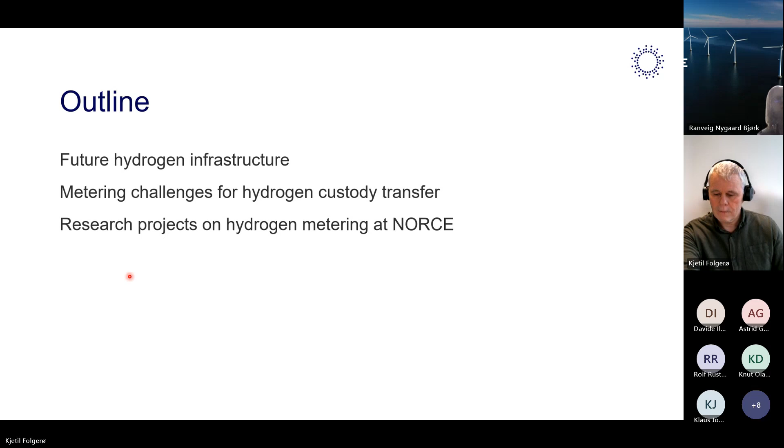Page down is not working.

Here we are. Okay, if we look at what the European Union and the International Energy Agency think about hydrogen, they say that it will be an important part of the green shift. In the EU, they plan for an import of 10 million tons already by 2030, and in addition to produce another 10 million tons themselves within the EU.

As you can see in the figure to the right here, which is a global forecast by Det Norske Veritas or DNV, today we are not producing much, but that will increase steadily and very fast from 2030 approximately. What we also can see is that a large part of this increase will be industrial usage of energy and also transport, long distance transport first of all.

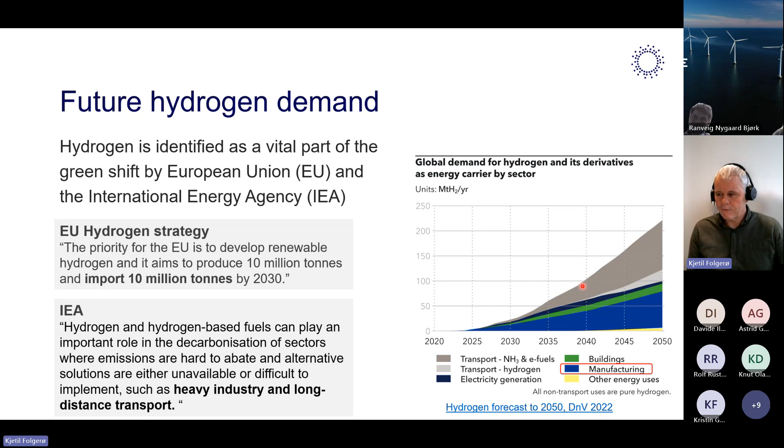So if that's gonna happen, that means that we need to build a new value chain here. We need new production facilities, new storage and distribution facilities, and also new applications coming in. And all this has to happen at the same time. Different people have looked into this to see how the transportation can be made most cost efficient. And it seems for Europe at least, that pipeline transportation will be the main distribution method.

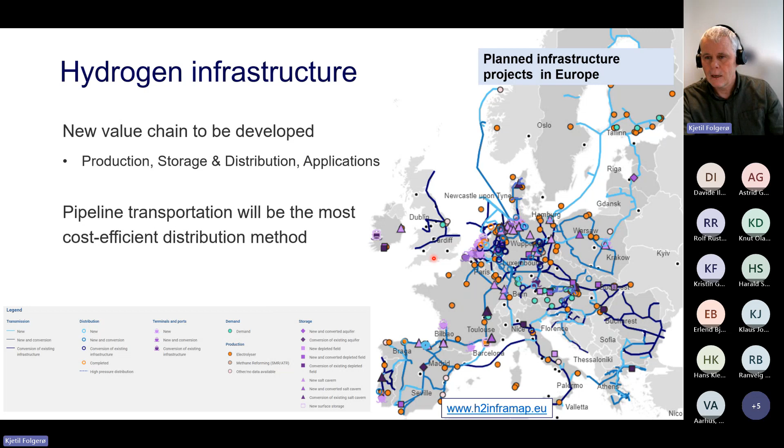Here are some planned infrastructure projects, and you can see some of the pipelines that are planned today. One of the initiatives is the European Hydrogen Backbone, where European energy infrastructure operators, 33 of them, come together, covering 28 countries in Europe. And they are at the moment planning for this kind of structure in 2030. For instance, they are planning for 5 different import corridors, one from Norway/UK, further from the Baltics, and also from the south from Africa, and other places as well.

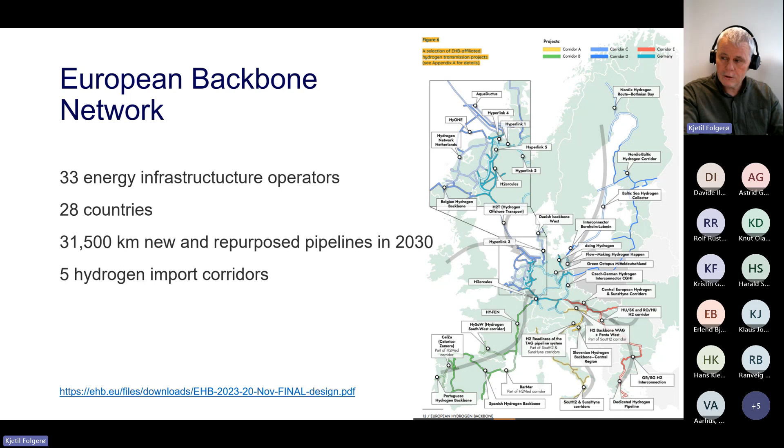And one of these corridors will maybe include the Norwegian pipeline that has been studied from Norway to Germany, where a feasibility study was carried out by Gassco and DENA, where they plan to produce blue hydrogen or low carbon hydrogen in Norway, in Nyhamna on the west coast of Norway, and transport that to Germany. In addition, we might add some locally produced offshore hydrogen coming from wind parks on the way.

So what we see is that at the moment, most of the hydrogen is produced locally and applied locally. So most of the pipelines that exist today come from a local producer to a single industrial user. That means it's quite easy to know who will get paid how much. In the future, the hydrogen pipelines will be integrated in a much more complex energy grid. We try to illustrate that in the figure to the right here.

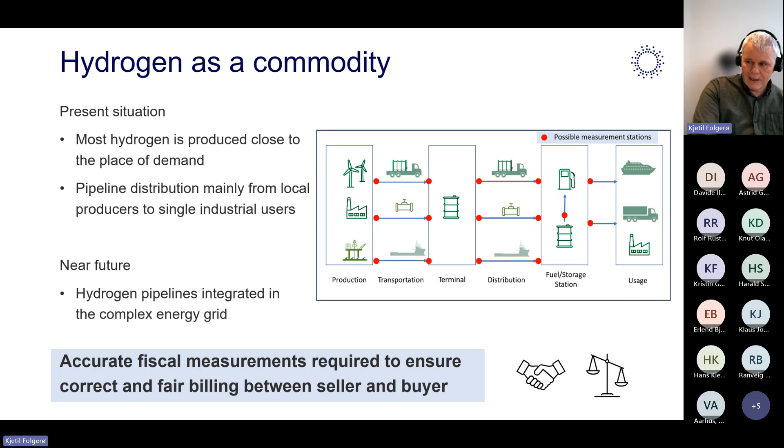It would be a mix of different transportation means, where pipelines will be the main thing for long distance transportation or medium distance distribution. Anyway, to make hydrogen a commodity, as the EU is planning for, there is a need for accurate fiscal measurement so that the seller and the buyer get the correct and fair billing. That's the thing about custody transfer. We need to know that everybody is happy. So we need to measure accurately.

Okay, when it comes to hydrogen metering, we want to adapt measurement technology from the oil and gas industry. There's a long history of how we can measure natural gas with low uncertainty and high reliability. The challenge with hydrogen is that the properties are a bit different from natural gas. The meters will respond differently, so they may be tuned or adapted for hydrogen. Further on, there is a lack of industrial experience in the metering issues here, and when it comes to calibration and test facilities.

Further on, also due to this, there's a lack of knowledge of the actual uncertainties and the technological risk regarding the different meters that will or may be applied. And lastly, the regulations are not in place, and the standards that the meters need to follow are not quite yet there. So the research question here is that, knowing that you need to build this, how can we do it? How can robust and cost-efficient measurements of hydrogen along the supply chain be ensured?

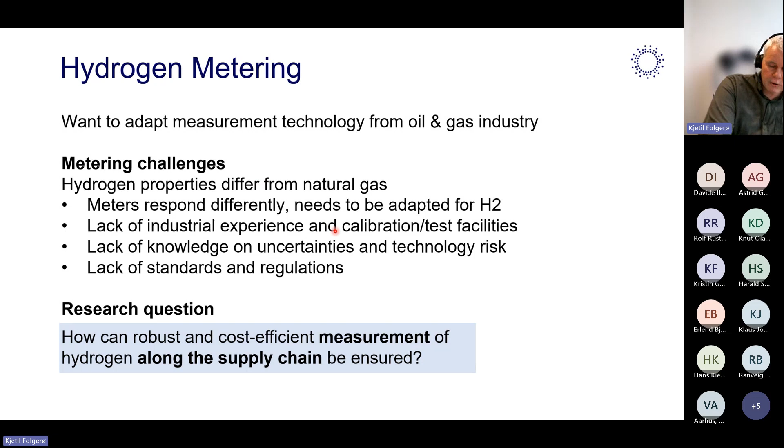To dig a bit into the hydrogen properties here and how they differ from natural gas. Well, hydrogen is the lightest molecule we have. So the density is much lower, the viscosity is lower, the speed of sound is higher, some examples. And all this will affect what we measure by the different measurement technologies here. And that again will affect both the uncertainty of the different meters and also the operating range of the meters.

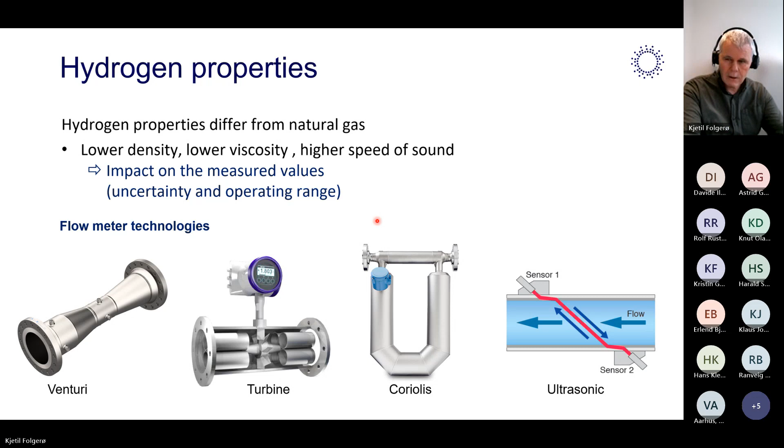The last case here is the ultrasonic meter that was mentioned earlier in the introduction. What we see here is that the speed of sound in hydrogen is much higher than for natural gas, which means that the transit time of the signal will be shorter. It will affect the measurement uncertainty and also the operating range if you don't do anything with the technology. So you have to adapt it. You have to either increase the lengths or do something with the measurement frequency. That's an example of technologies and how they are affected.

Other issues with hydrogen compared to natural gas: if you want to transport the same amount of energy as you do with natural gas, you either have to increase the volume rate or use a much higher pressure, due to the lower energy content per volume in hydrogen versus natural gas. Then hydrogen is a very small molecule, as we mentioned, which means that there is an increased risk for leakage. So we have to ensure that there are no open spaces or gaskets where leakage can happen.

The ignition energy is much lower for hydrogen than natural gas, so we have to consider the explosion safety. And also hydrogen embrittlement may be a problem. So we have to select the material for the meters such that they can perform over a long time.

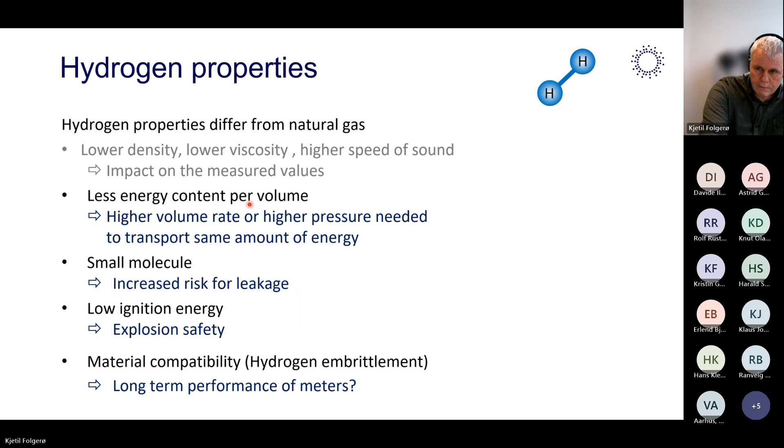That's another one. This should be hidden.

Okay, let's take a look at the projects we have here at Norce when it comes to hydrogen metering. We actually have three projects or activities going on. The largest one, which I'm going to talk most about, is what we call HyMe.

So I'll start there. That's the competence building project called hydrogen metering, which started last year. This is partly funded by the Research Council of Norway, and also by the project partners putting in either cash or some in-kind contribution. So the project partners are Shell, Total, Equinor, Gassco, Justervesenet, and the research partners here are University of Bergen and NORCE.

So what we look at is, we have one work package on the metering technologies themselves. So we want to figure out how the different metering technologies respond to hydrogen, how the uncertainties will be, or how the technical risk will be for those meters. The next work package is on the measurement station concepts. That is, how do we combine different meters at different measurement points along the supply chain. Then we have a work package or activity on traceability and calibration of the meters, I'll come back to that. And the last one, we will look at losses and quality degradation throughout the supply chain.

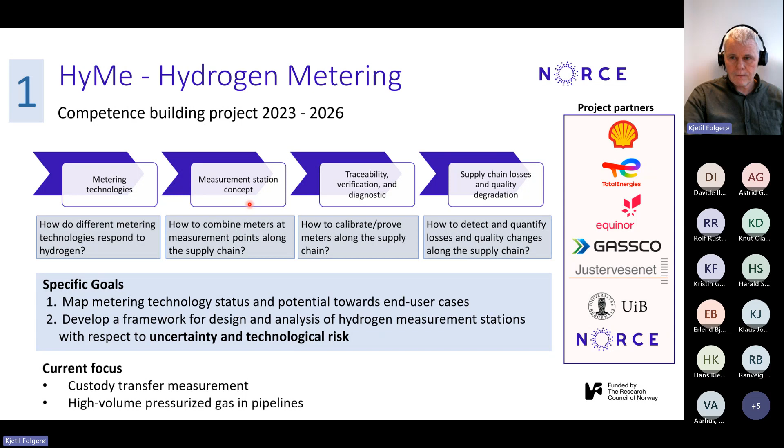The project partners here are very focused on high volume transportation of pressurized hydrogen gas in pipelines. So that's the main focus in the project. And of course, then it's custody transfer that is of interest. Here's a bit more detail on the first work package on the metering technologies themselves, where we map the status. A measurement station typically consists of flow measurements to measure how much is transferred through the station, and also some means of measuring the quality of the hydrogen that is transported. So we are mapping both flow and quality meters.

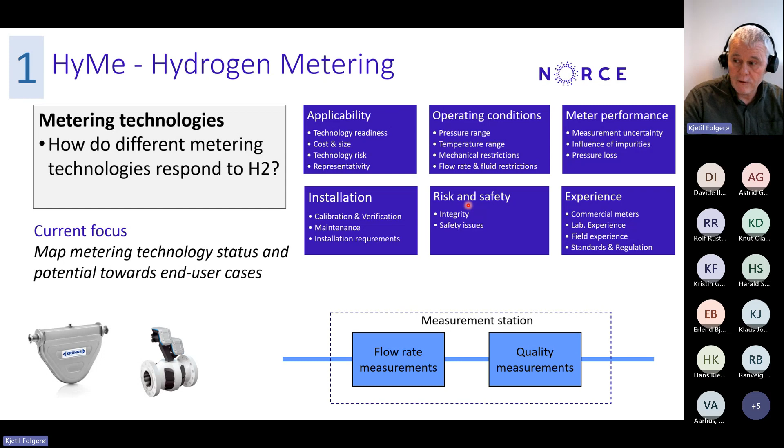And we are looking at the applicability, where can it be used, how ready is the technology for implementation. We're looking at the operating conditions, what kind of flow rates are we talking about, what temperature, pressure ranges, are there any mechanical restrictions with this kind of meter? And of course, we look at the performance, uncertainty values, how will impurities affect the measurements, will the pressure loss through the meter be large, and so on. There are several things we map each technology against. And we do this by talking to vendors, digging into literature, doing a lot of calculations ourselves, and so on.

The next work package is on the metering station, where we want to combine it. Here on the right-hand side, you can see a drawing of a typical metering station where we combine two different flow meters in parallel with an online GC for measuring quality. That's a typical situation of a custody transfer metering station, but it could look different. Could be another measurement technology, and it could also be meters in series instead of in parallel.

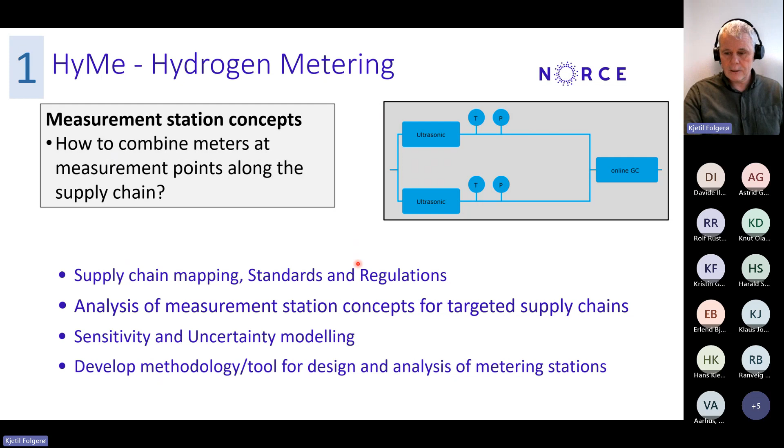So what we do in this work package is, first of all, put up some realistic supply chains. We have looked into all the plants that are in Europe. We have discussed with the partners how they foresee building their pipeline systems, what kind of flow rates they expect, and what kind of qualities they expect to transport. So we analyze that. We look at the sensitivity and the uncertainty of the complete metering station. And we also aim to develop a software tool for this.

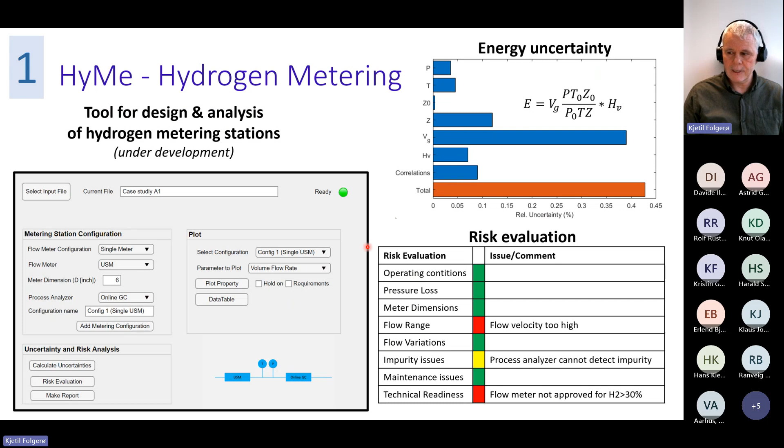And here is an example of the tool that is under development, where we can read in data for a given metering station, what the volume is, how it changes with time, and also how the quality changes with time. And then we can configure a metering station for that and do some risk and uncertainty calculations. This is just an example.

The work package on traceability and calibration is more related to, well, we have a meter. How do we know how accurately it actually measures? Here we play along with Justervesenet, who are the experts on this. They are working on the traceability all the way back to the SI unit, and then through national standards, laboratory standards, and so on, all the way up to the measurement that is in the process. The trouble now is that there are not very many calibration flow loops available for hydrogen.

Most of the ones that are there are for very low flow rates, and therefore cannot really be used to test the high volume meters that we want to examine. There are some that are coming up, have started. There is one that started last year. That's about it in the world. So there's a lot more to do.

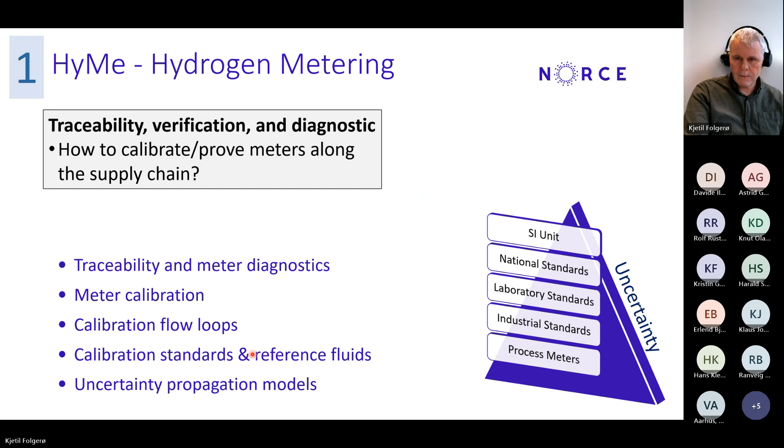We also have a work package on losses and quality degradation along the supply chain. And here we have a PhD student at the University of Bergen who's focusing on this part of the project. So the idea here is to identify high-risk nodes for losses and degradation of quality. We want to look at how quality could be found in a more cost-efficient way than is done by the large GC measurements, and so on. We will look at the mass and energy balance throughout the supply chain, and so on.

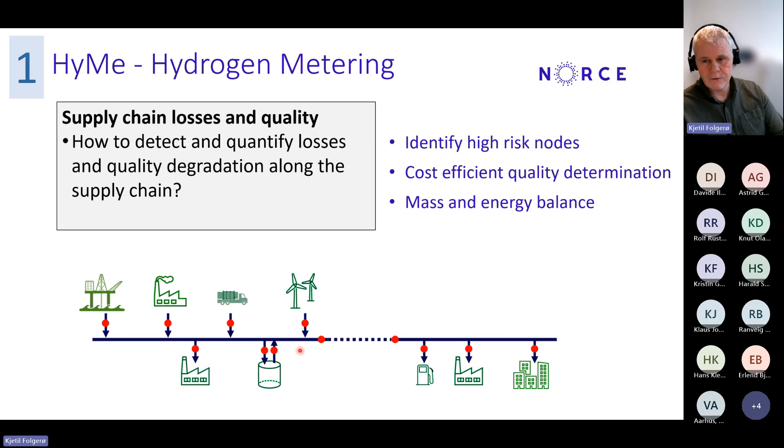As an example, we see that when you store the hydrogen in, for instance, subsurface storage facilities, that will affect the quality of the hydrogen. So the question is, how can we ensure that it's below certain limit, and how can we measure it efficiently, and what needs to be measured? Okay, that was the first and really the largest project we have.

Then we have another project here called Metrology for the Hydrogen Supply Chain, which is an EU project. It's a European partnership on metrology called Euramet that is funding this project. Here we are 27 European partners. From Norway, it's NORCE and Justervesenet taking part. We at NORCE are heading work package 4 on measurement uncertainties, and Justervesenet is heading work package 2 on flow measurements. Then there are also work packages on hydrogen gas qualities and other supporting technologies for hydrogen.

What we look at here is two things. It's the more fundamental things. We look at time correlations, other correlations within the measurement, so that we can ensure that the uncertainty is as low as possible. We see how that affects measurements. And then we also dig into some case studies on example supply chains. At the moment, we have listed 4 case studies we will go into.

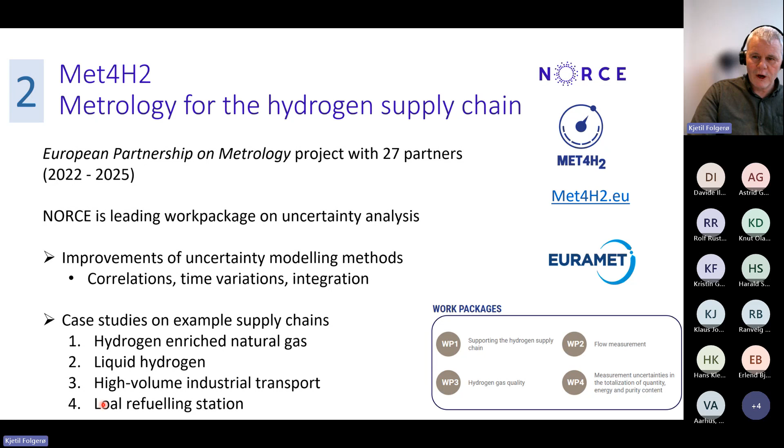Then the 2 last, that's high volume industrial transportation through pipelines we're looking at. We are also looking at the local refueling station, how the uncertainty of such a system will be. Okay, just one slide for that project.

The last project or activity we have is a part of the HyValue FME center that NORCE is heading. And here we have a task called robust metering for supply chains. And here we have two focuses. One is to spread the information from the HyMe project over to the HyValue consortium and back from HyValue to the HyMe project.

And then in addition, we have a very specific focus where we look at indirect gas quality measurements. How can we combine different measurement technologies in order to get information about the quality? What we do here is look at, can we combine ultrasonic measurements of the gas with dielectric or electromagnetic measurements and some optical spectroscopy measurements, and see how we can correlate that to the gas quality. We have several master students connected to this. So we have started building and actually getting results on the dielectric measurement system.

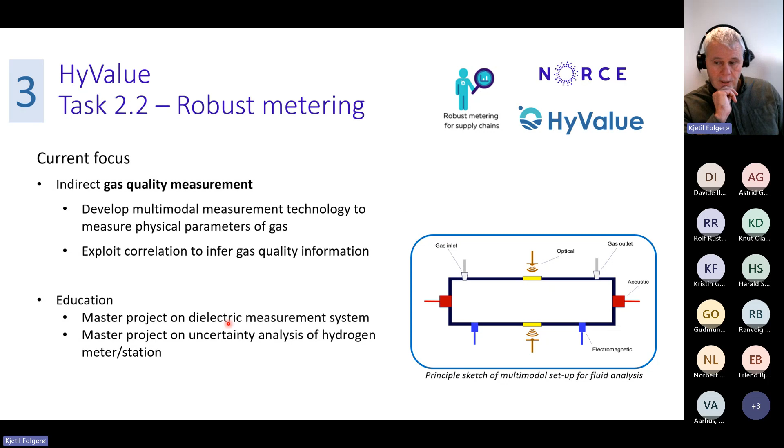And that's what I had to say today. It was a quick round through metering. Thank you.

Thank you. Very interesting. And